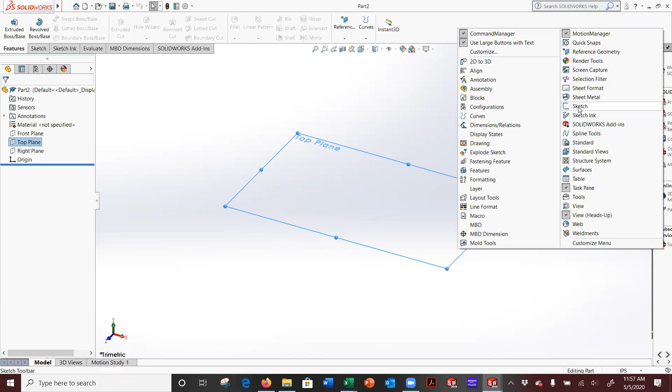If it's not on, you want to turn it on. Mine's on now. And then you start by creating the base. It's all about the base. So when we get in here, we're going to make our basic shape.

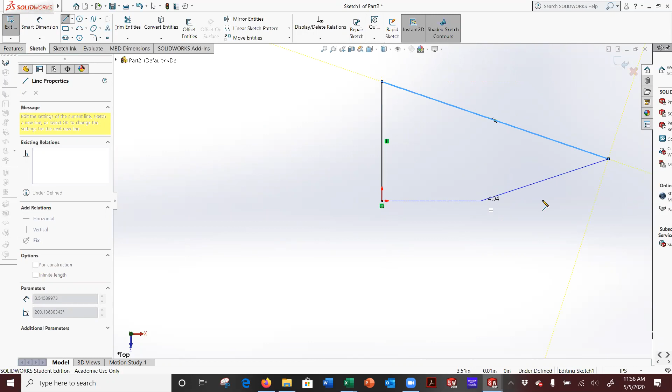This is going to be half of a wing. I am winging it up, no pun intended. Every pun intended.

Of kind of what the wing will look like. This should be horizontal. This is what it looks like and it's flat. Okay, and then that's going to be the first shape. The thickness will be whatever the defaults are, I'm not going to worry about it.

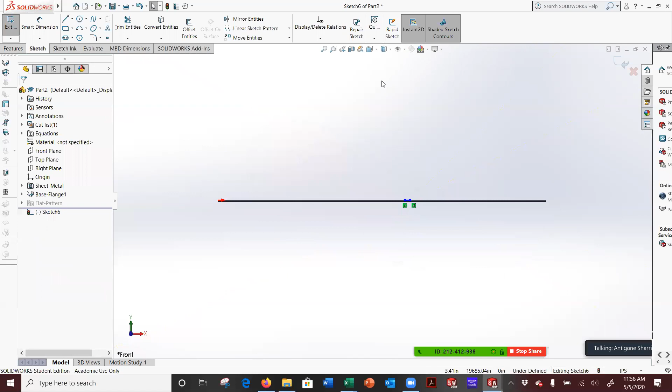Your next step would be somewhere in this face, we're going to put in a bend line. Let's say it's going to be somewhere here. Now you notice, somewhere, I was very, very non-committal on where. I just threw it in there somewhere, just something like that.

This is part of a wing. I recommend that your wing go all the way inside the part, or I'm not sure how the marriage piece will have to work, but let's say it slides into whatever the body is.

So now you have this bend position. So here you have this option called sketched bend. The bend is there. Oh, let me get out of the sketch. Must have disjointed lines. I did, I really, really did.

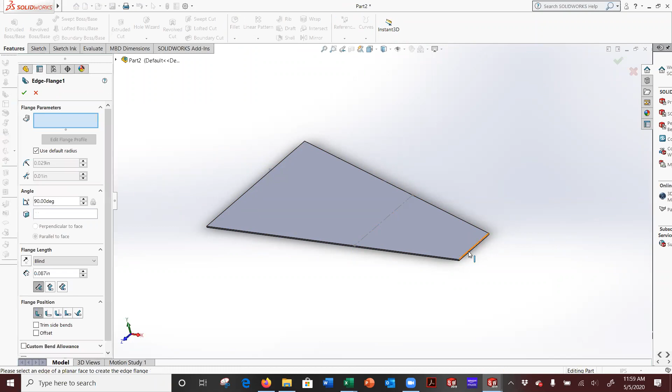There we go. Okay, so now you see you've got the choices for bend here. You've got edge flange, convert to sheet metal. Edge flange, which is what you're used to, is like actually picking an edge, which we're not. We have a specific spot we're looking to bend over.

So there's your bend. This is your sketch. Invalid sketch, must have had disjointed lines. Fine. Okay, let me try that again. I'll delete it. I'll just start in that bend.

How about that? Pick the face. I'm going to create a line. Of course, I'd be much more specific in how I'd create this line. Hit OK. Come on. There we go.

Now the bend position. This is the piece. Whoa, see that? Yeah, you're bending that up. Where do I want that bend to be?

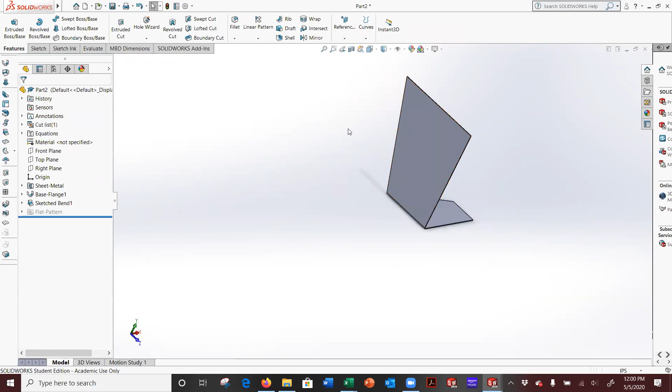I'll just be random about it. And we're going to hit OK. Now look what it bent over. It bent over the other side. See? So what it bends over, you don't always notice.

So that's where you have to... the reason it was disjointed was because I used center line instead of a solid line, by the way. So what you have to do is pick the side you want to bend.

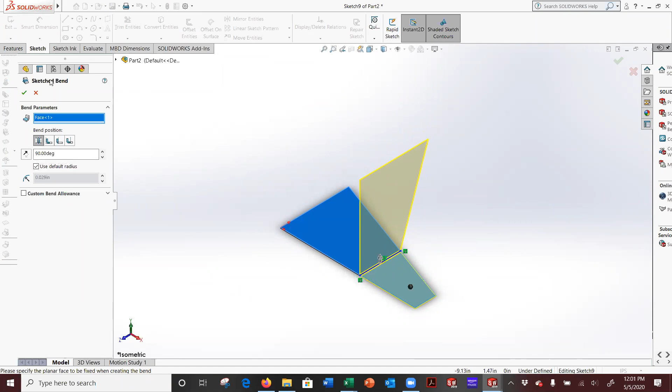Let me go back to isometric here. Hold on. That's the side it wants to keep. I'm going to X out of this again.

The side I want it to bend is this side, not that side. But when I pick this face, and I go to sketched bend, all right, I'll pick that.

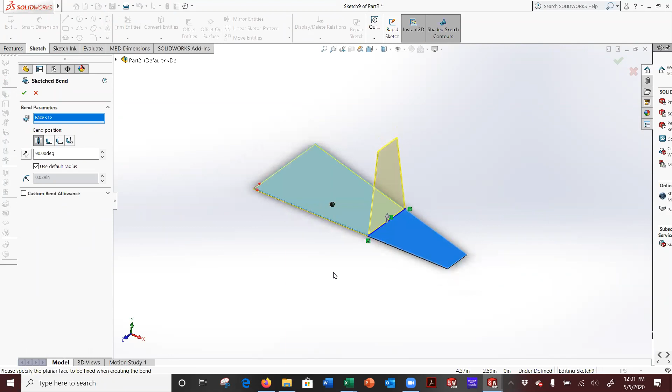There you go. I kept picking the wrong side. You pick the side you want to stay flat. I think I was picking the opposite side. Yeah, see that? So there's your wing popping up.

What's really cool about doing it this way, if you realize, no, I really don't like that spot, you can go ahead and literally edit the sketch and drag it. Let's say I only want this much of it.

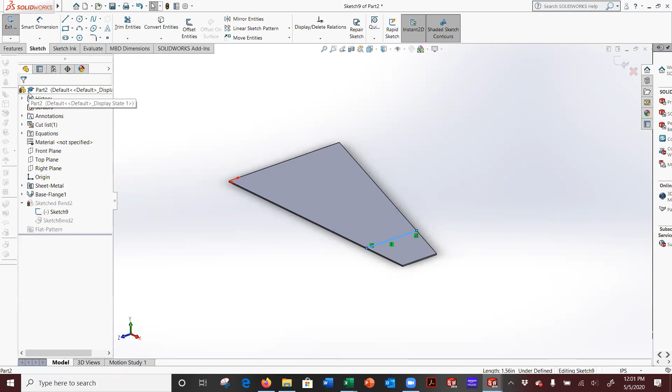You hit OK, and that's what you're going to get. Just that much of that wing. Isn't that gorgeous? Yes. And that's what you get to make your wing.

And that's it. Thank you. You're welcome. I think that worked.